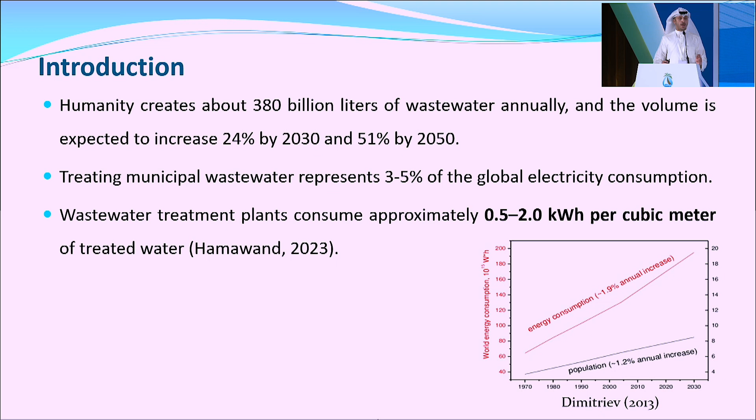Why do we have to implement such research in this field, or in Kuwait especially? The answer is two reasons. Firstly, Kuwait's vision for 2035 is to provide 15% of the energy required in Kuwait from sustainable resources. Plus, the second one is the population growth in our countries, which leads to stress on our water resources, and as a result we will generate more and more wastewater every single year.

As a result, we will treat that huge amount of wastewater. To treat this amount of wastewater, we need energy. Based on our recent literature, we found that between 3 to 5% of our global energy consumption was used in the water industry sector. By the way, to treat 1 cubic meter of wastewater, we need between 0.5 to 2 kilowatt hour. So you can imagine how much energy we need to treat all that amount of wastewater.

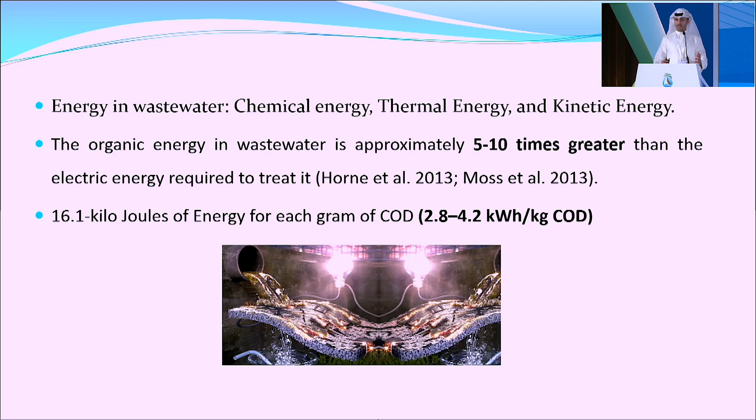On the other hand, wastewater is a valuable resource of energy. Do you know that wastewater contains 3 different types of energy? It contains chemical energy, which is hidden in the chemical compounds and the bonds between the chemical molecules. Plus, we have thermal energy, which is available as heat in wastewater, and we can extract it. Thirdly, the kinetic energy, which is the motion of wastewater from one location to another.

The organic energy in wastewater is approximately 5 to 10 times higher than the energy required to treat wastewater. So there is a massive amount of energy in wastewater. Each 1 gram of COD contains 16.1 kilojoule, so each kilogram of COD can produce between 2 to 4 kilowatt hour.

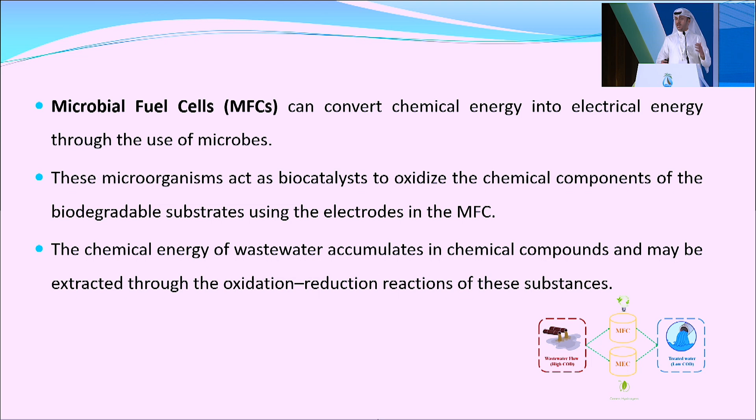There are different technologies that we use to harvest energy from wastewater, such as anaerobic digestion and bioelectrochemical systems, which include the microbial fuel cell. Microbial fuel cell is a unique technology that can convert the chemical energy in wastewater into electricity and can be used directly in different applications. The microorganisms in the microbial fuel cell act as a biocatalyst, meaning they can extract the chemical energy from the bonds and compounds and convert it into electricity.

The chemical energy accumulated in the chemical compounds can be harvested using oxidation reduction reactions in the microbial fuel cell. So the microbial fuel cell contains 2 main chambers: the anode, which operates under anaerobic conditions where the oxidation reaction takes place, plus the cathode, which works under aerobic conditions where the reduction reactions take place.

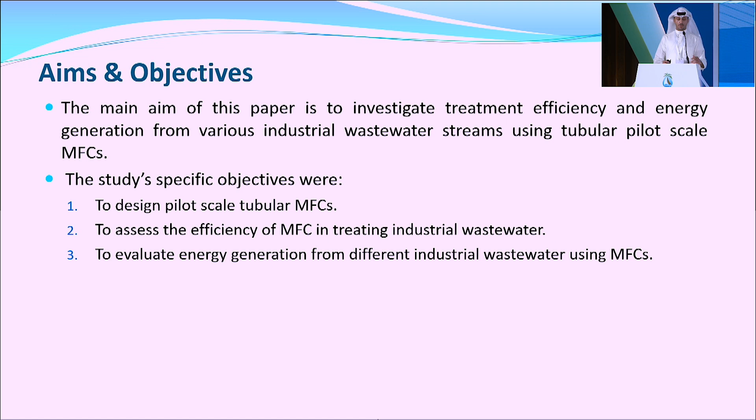Our aims and objectives for the study: the main aim is to investigate the treatment efficiency and energy generation from various industrial wastewater streams using microbial fuel cell. The specific objectives are: first, to design, operate and install a pilot-scale tubular microbial fuel cell; secondly, to assess the efficiency of MFC in treating wastewater; thirdly, to evaluate the generated energy from microbial fuel cell.

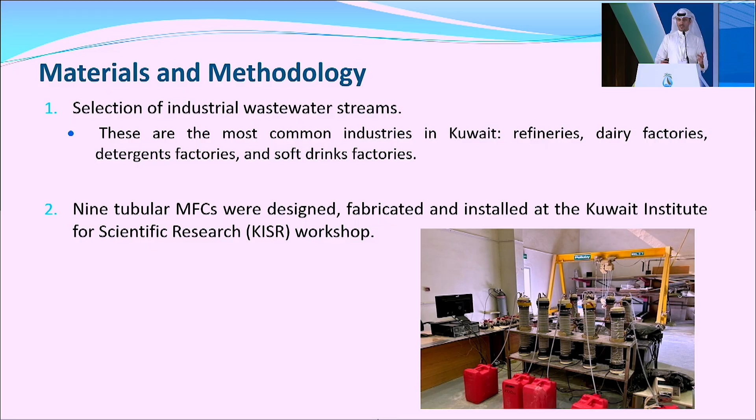Our methodology to execute this project: first, we had to select what kind of industry we are looking for. So we did a basic survey in Kuwait to identify the major industries in wastewater. Based on our results and the available literature, we found there are four main industries: first, the petrochemical industry; secondly, the dairy industry; thirdly, the soft drinks industry; and finally, the detergent industry.

From each industry, we selected 2 factories to represent it. Based on the characterization of each industry, we selected 4 factories to represent the 4 industries. The selection was based on the COD concentration, the nutrient availability, the conductivity, and the pH.

Secondly, we designed 9 tubular microbial fuel cells and ordered all the raw materials. Every single piece was fabricated at the Kuwait Institute for Scientific Research. We divided the microbial fuel cells into 4 main groups, each targeted for a specific industry.

The picture on the right shows the design of the microbial fuel cell. We used PVC pipes with a length of 75 centimeters, a diameter of 10.5 centimeters, with an overall volume of 6.5 liters. We used real wastewater from the activated sludge to inoculate the microbial fuel cell, or the bacteria, in the microbial fuel cell.

We used a carbon brush anode connected to titanium wires, plus we used a carbon cloth cathode. The PVC pipes had holes of 1 centimeter. The main idea of the holes is to keep the industrial wastewater in contact with the cation exchange membrane.

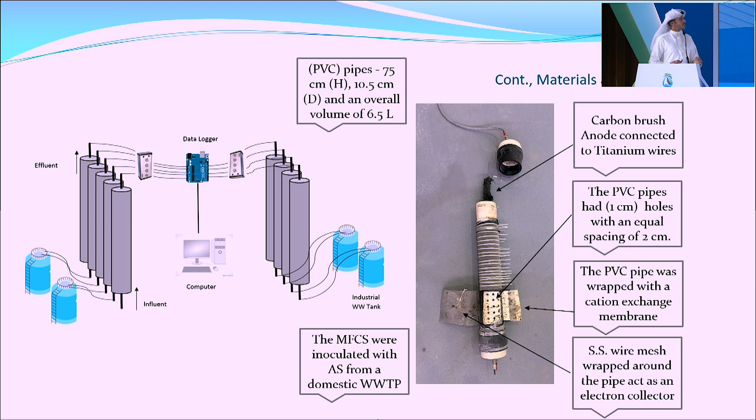We also used a CE cation exchange membrane, which is wrapped around the pipe, and on top of that we used a stainless steel wire mesh. The main idea of the stainless steel wire mesh is to collect all the electrons produced during electricity production. As you can see, we have 9 MFCs, and each 2 MFCs were fed with a specific industrial wastewater. The MFC was connected to a resistance box so we could manipulate the load, selecting different loads, and it's connected to a data logger which records the produced voltage and stores it in a PC.

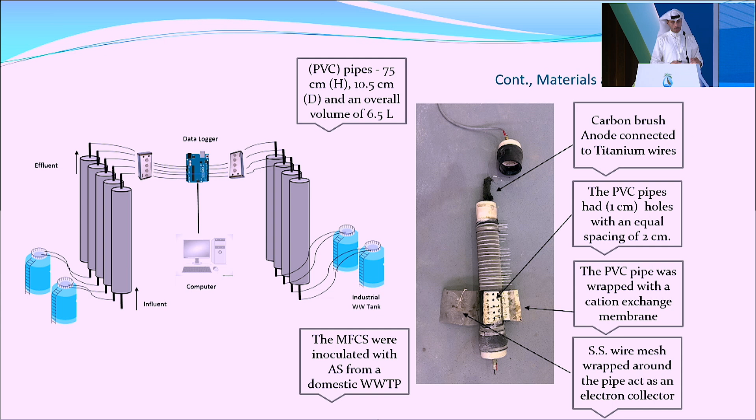The results: all the MFC were continuously operated for more than 120 days, and thankfully we haven't had any major issue with our microbial fuel cell. We had just minor issues such as blockage of the pipes, because all the industrial wastewater was fed to the MFC without any filtration, so it was raw industrial wastewater.

All the MFC generated a maximum open voltage. By open voltage, I mean there was no load, so this is the maximum the MFC can achieve. The dairy wastewater achieved the highest open voltage, about 0.62 volt, followed by domestic wastewater at 0.5, detergent at 0.49, soft drinks at 0.46, and finally the petrochemical industry.

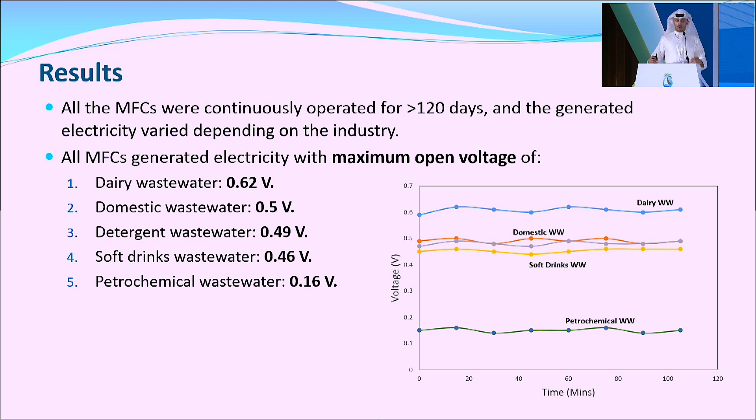By the way, with the petrochemical industry we had a major issue with the characterization of the petrochemical waste. It contains different toxic materials, such as anti-foaming agents, corrosion inhibitors, and demulsifiers, which could inhibit the growth and activity of the bacteria, and that led to the low generated voltage in these MFC.

In terms of Coulombic efficiency, we mean the amount of electrons we harvest from the industrial wastewater that can be used for electricity production. So the higher the CE, the higher the MFC efficiency. Our CE was too low in this study, between almost 0 to 2.9. 0 was for the petrochemical industry, and the maximum 2.9 was for the soft drinks, I believe.

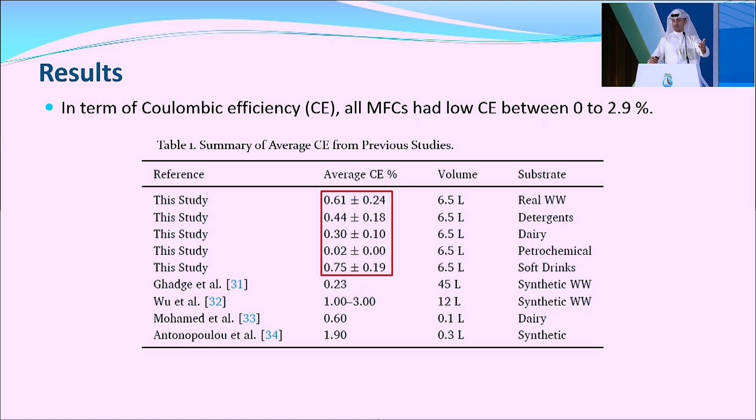If we compare our results with different literature, it seems our values are in line with them. In some cases, our values are even higher than small-scale microbial fuel cells. By the way, I have to mention we are using real wastewater without filtration, so it's very complicated. If we could just convert it to synthetic wastewater, we would for sure have higher efficiency of the MFC.

In terms of power density, the dairy wastewater was able to produce...

One minute, please? Four minutes? One minute. One minute, sorry.

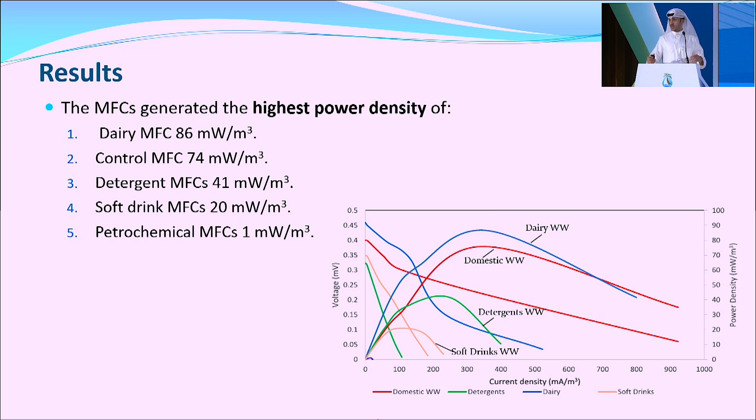So our highest power density was achieved in dairy wastewater, and each cubic meter of wastewater can produce between 86... I have to go fast.

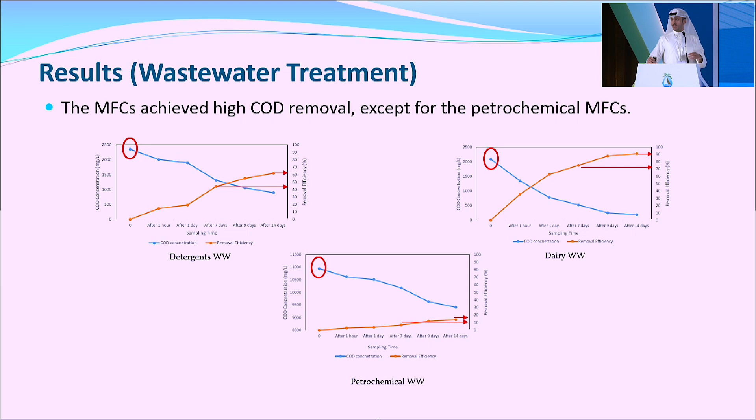In terms of wastewater treatment, the MFC achieved a very high efficiency of treatment, especially with the COD removal efficiency. I have to go fast.

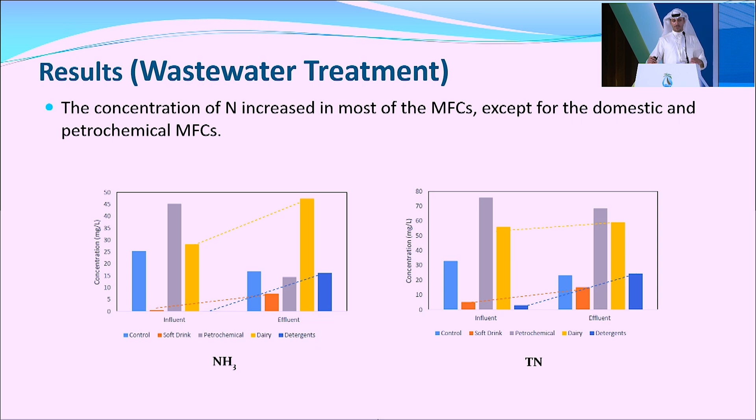In terms of nutrient removal, the MFC were not able to remove nutrients such as phosphorus and nitrogen. By the way, phosphorus was increasing in all the MFC because under anaerobic conditions, bacteria try to release the stored phosphorus in their cells, so we have high phosphorus in the effluent. In terms of nitrogen, it followed the same pattern, except for domestic wastewater, which was operated as a control.

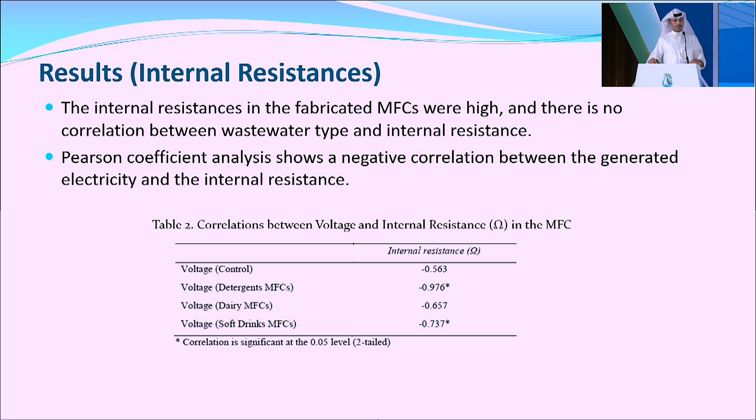In terms of internal resistance, the MFC had a high internal resistance, which negatively affects the performance of the microbial fuel cell. For the conclusion and recommendation: I think the main idea of this project is to characterize and identify the best streams that can be used for microbial fuel cell, and it seems that the dairy industry was the best stream for this purpose.

Before I talk about the membrane part and functionalization, I would like to talk a bit about some of the leading work that we do in the center. We do a lot of work on water treatment using membranes, and one of those is membrane distillation for hypersaline water.

This is a project that we have with the Ministry of Agriculture and Fisheries Wealth and Water Resources in Oman. We have a pilot plant where we desalinate brine water coming from an RO desalination plant, from inland desalination.

We also do membranes for medical use, and we have a patent application on catheters trying to reduce the infection rate from using catheters in hospitals.

We recently, two years ago, applied for a patent on membrane recyclability. Of course, we rely on reverse osmosis in almost all of our desalination. Probably only maybe Emirates still rely heavily on MSF and thermal desalination. However, we have been transitioning towards reverse osmosis.

With reverse osmosis, we have a lot of RO membranes that we throw away. With this work, we recycled the RO membranes so that we can use them for wastewater treatment. We are currently trying to move forward and repurpose this, reapplying these again for desalination as well. This is the next phase of our work.

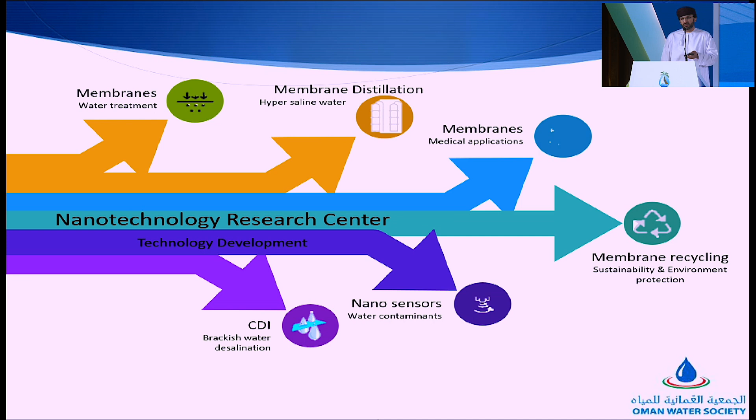We are working on nanosensors for water treatment and sensing of any kind of fouling, and this is a patent that we are currently working on. We are also working with capacitive deionization for brackish water desalination, and we have two patents on this. So very briefly, that's all of the work that we do in the Nanotechnology Research Center.

Before we talk about membranes, we need to talk a bit about wastewater. In Oman, it's not really the usual wastewater that we need to think of. It's also the produced water, but I'm not going to talk about produced water. I will talk about other industrial wastewater, because not all of the water is domestic or municipal wastewater. There are a lot of other sources of wastewater.

These are very difficult to work with, and also it's not easy to determine what exactly is the best treatment for it. Probably we need a lot of different treatments for it.

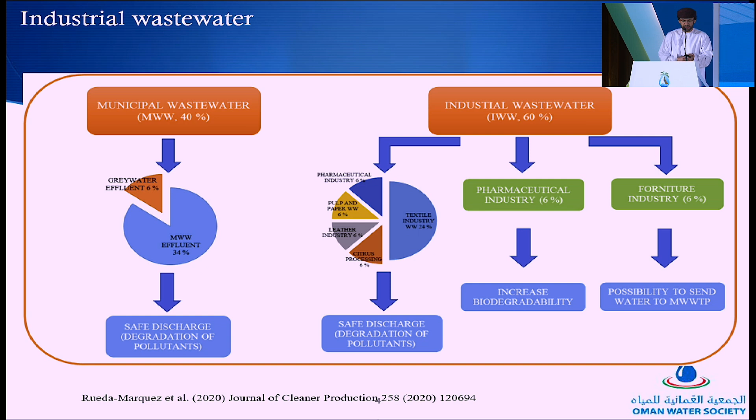Just to stir the pot, I know there are a lot of people here advocating using treated wastewater for agriculture purposes. That's fine, but also we have a problem with emerging contaminants, or what we call persistent contaminants.

There are a lot of studies on this. We worked with groups from South Africa and other areas where there are a lot of persistent contaminants that usual conventional wastewater treatments cannot remove.

These amounts are very minute, and usually for water quality, we just look at it as a number rather than a type. What type of contaminants are there in the treated wastewater?

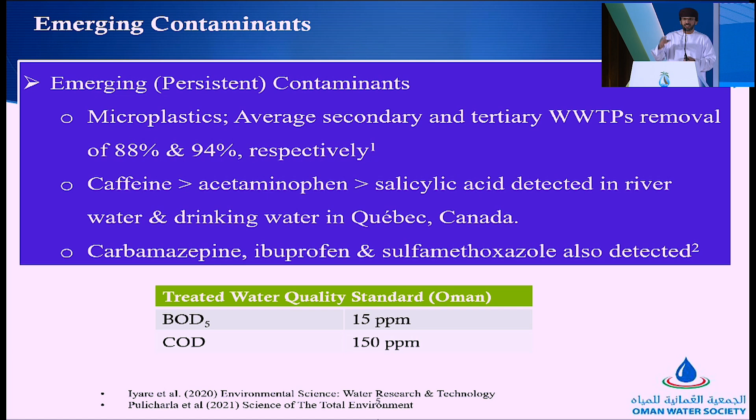A lot of antibiotics, a lot of medical compounds, even caffeine is there in the water. In South Africa, our team collaborators found a lot of caffeine and other endocrine disruptors in the Antarctic, where penguins had a lot of fatalities because of these endocrine disrupting chemicals.

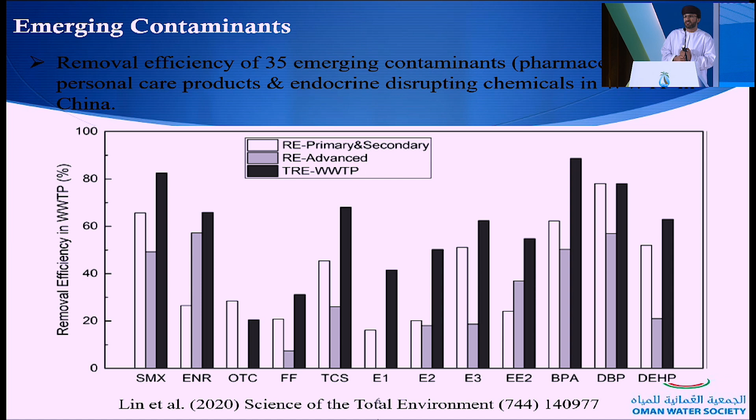This is a study that was done in China for 35 emerging contaminants, mainly pharmaceuticals. As you can see, it's not really easy to treat those with domestic or municipal wastewater treatment. Some of those treatments only remove 10 to 15% of those. And again, 1 microgram or 1 milligram per liter is a lot for these.

They are very toxic. So moving forward, these are membranes. Of course, the usual membrane that we talk about is the typical one, which is pressure-driven. We apply pressure on one side, and then the water will pass through the semi-permeable layer or membrane and will not allow the other contaminants to leave.

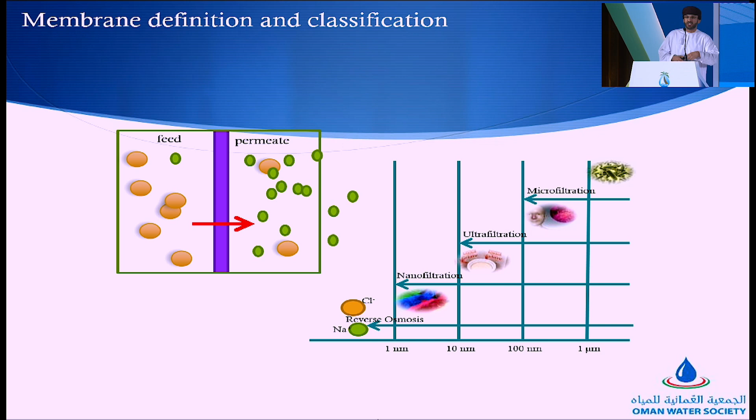And that's why we have these differentiations from microfiltration to reverse osmosis. However, there are a lot of other membranes and technologies not covered here. We talked about membrane distillation yesterday, there was a talk about forward osmosis, pervaporation membranes, and microbial biofuel cells as well - they use membranes. Even capacitive deionization, we can apply membranes there. Of course, not even talking about electrodialysis and electrodialysis reversal and all of those.

I'm not really going to talk about this in detail because it requires a lot of time, but we rely on membranes in almost all of the desalination and water treatment we do. Whether it's wastewater treatment with membrane bioreactors, or desalination with reverse osmosis and ultrafiltration, microfiltration for pre-treatment. There was a lot of talk about nanofiltration for pre-treatment or desalination for brackish water, although it's really not taking any push in that regard.

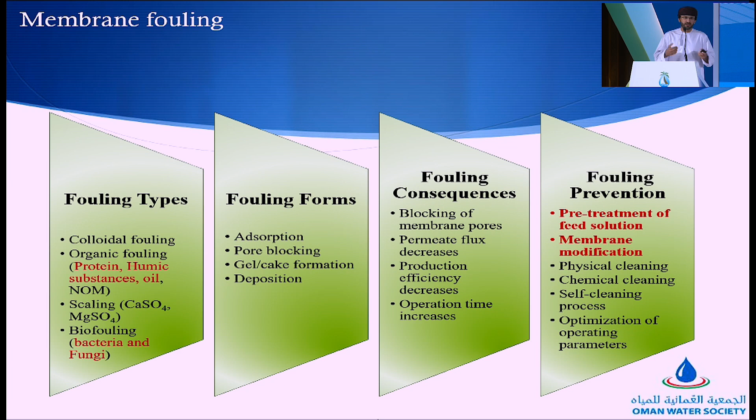But we also have a lot of problems with fouling - different types depending on the water source. Biological fouling is the main one for reverse osmosis and seawater desalination. Biological fouling and organic fouling is a main issue with wastewater treatment. And that's why what we do is say, why not functionalize these membranes with nanomaterials.

So that we can reduce the fouling, or at least increase the flux and the rejection. With nano applications, we have a lot of uses - we can use nanoparticles with the membranes as adsorbents or functional membranes for separation, Fenton catalysis, nano disinfectants which are very good and very strong, and a little bit about photocatalysis as well.

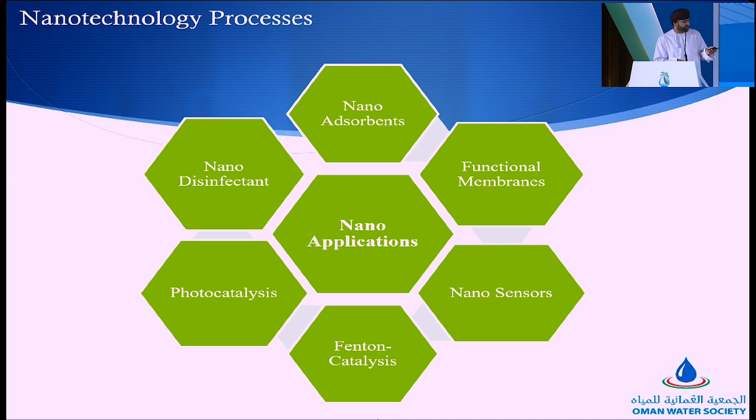So we need nanotechnology because compared to other technologies, it doesn't produce secondary pollution, or it produces benign secondary pollution that we can put in the environment without any harmful effects. It's also low cost, has high efficiency, and is environmentally friendly.

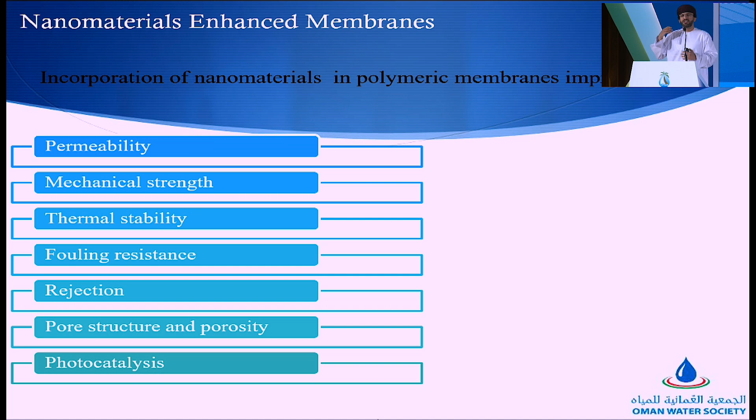And so when we talked about membranes, we don't really look only at the rejection and how much water we produce. There are a lot of important properties for the membrane. Permeability is important, mechanical strength is very important, thermal stability, fouling resistance, rejection, pore structure. And also photocatalysis, which is quite new, trying to have photodegradation as well as rejection of organic matter.

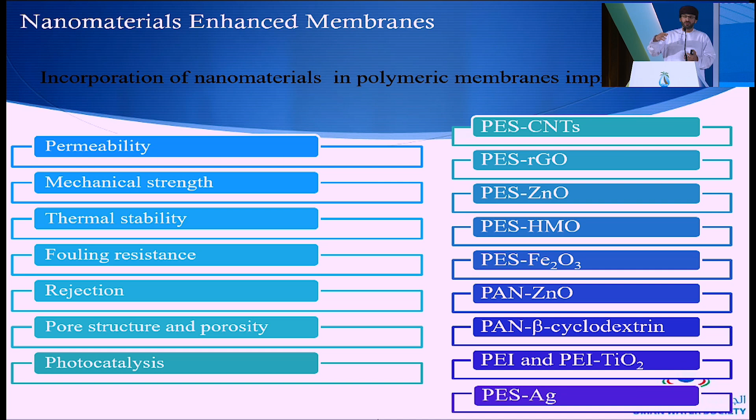This is why in the center we've worked with different polymers for the membrane network and structure, but also different nanomaterials for that - starting from carbon nanotubes, where we have a patent for this, reduced graphene oxide is another thing, zinc oxide and titania and silver as well. So we use different kinds of treatment.

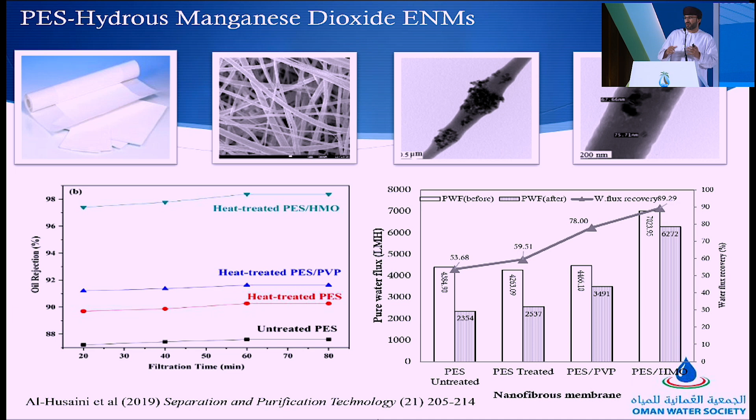Another work that we have done, for produced water from the oil industry, uses different nanomaterials - here we have the hydrous manganese oxide. And you can see that with the hydrous manganese oxide, we had close to 100% removal of the organic matter, but we also have higher water production. So the good thing is we have higher water production, which is fantastic, higher permeability, but also higher rejection, which is good in both ways.

Another study is photocatalysis. Photocatalysis is different from other treatments. What we need is an energy source, and previously it was ultraviolet, which is not really a good source because it's expensive and very dangerous.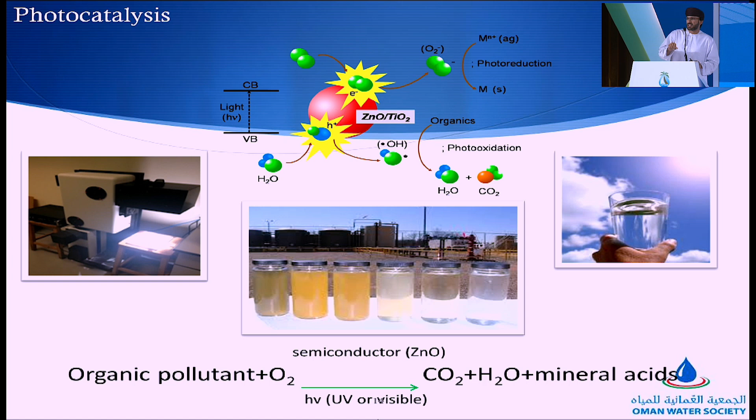What we use here is solar light, normal solar light. And what we need is a very basic contact between the nanomaterials, the photocatalyst, which is a semiconductor like zinc oxide or titanium, but titanium is not good for solar light. Zinc oxide mainly.

A contact between the organic matter at the surface of the nanomaterials with the solar light, and we have reactive oxygen species, electron holes, hydroxyl radicals, and all of those, and these will react with the organic matter, degrading them into carbon dioxide and mineral acids. And with that, all kinds of organic matter, instead of rejecting it and going into the reject, it's actually degraded and completely removed from the water.

So this is one of the studies we did in the marina for photocatalysts. This is with a group from the College of Agriculture and Marine Sciences. And we had very good results in that, no growth of any kind of macromolecular or micromolecular matter.

Another study for natural organic matter, and we got more than 77% degradation, whether it's rejection or full degradation of the natural organic matter. And also we had a higher water flux.

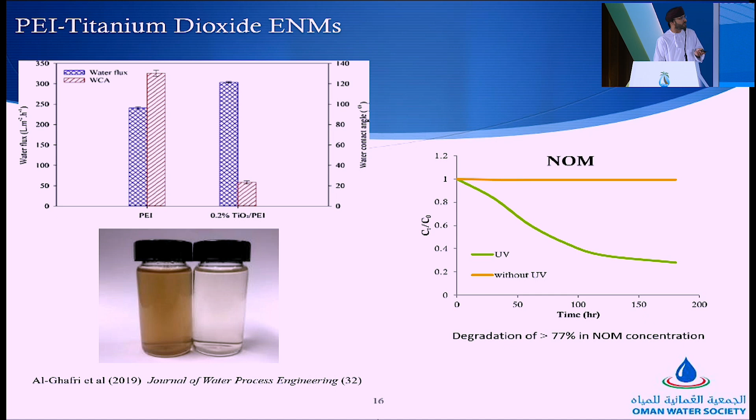Another study we have done is growing zinc oxide nanorods on the membrane matrix, whether at the surface or inside. We actually got amazing results, because one of the major 80% of the problems of reverse osmosis is biofouling, bacterial growth. And what this did, with the zinc oxide growth on the membrane matrix, even after 48 hours of operation, the bacteria is actually dead.

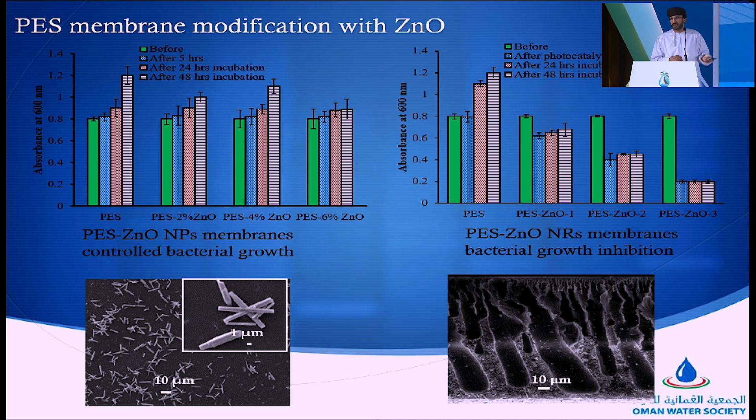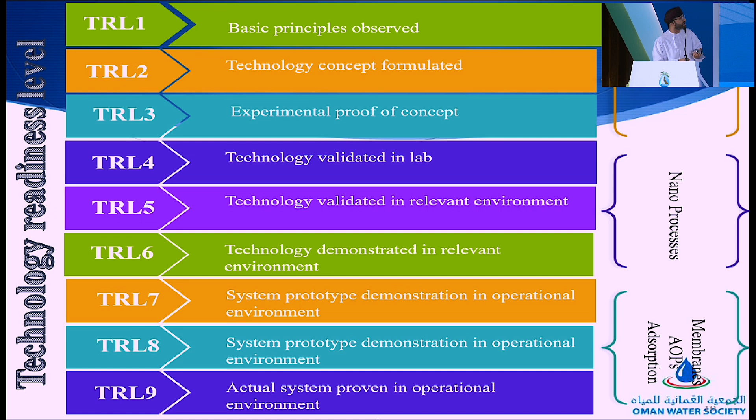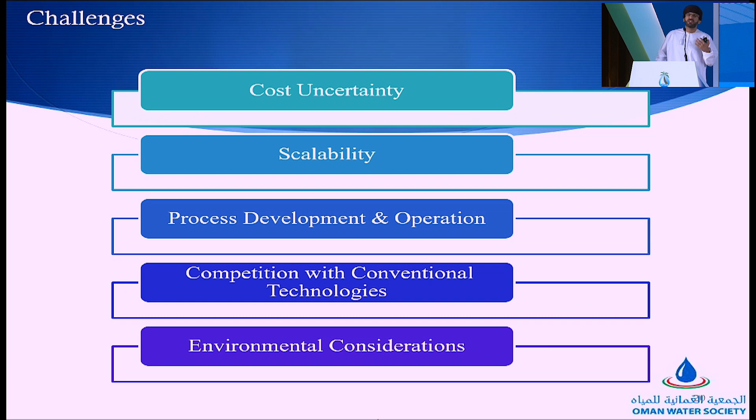Unfortunately, even with those results, we are really on the second part of the technology readiness. We are still in TRL4 to TRL6. This is because we have a problem with cost uncertainty. We don't know how much this will cost if we apply it in industry.

There is also a lot of competition with conventional technologies. The current companies have extensive experience in conventional methods, and of course they don't really welcome competition. So you need a lot of initial investment to push towards that, and other environmental considerations as well. And probably I will miss this, but also the problem is from our side as researchers and academics.

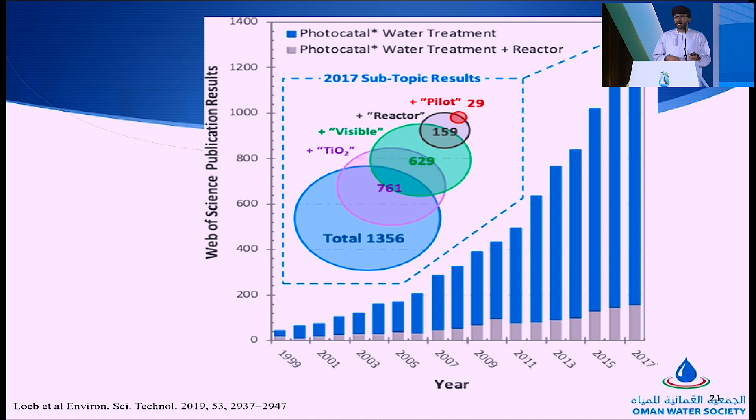We really concentrate on the fundamentals. So from this study in photocatalysis and water treatment, you can tell that almost all of the publications are in the main fundamental capacity building. Very, very few pilot studies and reactors, which is not really good if we want to apply this in the industry.

That's why if we really want to go forward, even if this technology currently is not suitable for the mainstream, for desalination of seawater, we can look at niche markets, small markets, industrial wastewater, dairy wastewater and all of that. Why not apply it for those? Because they are very competitive in that regard.

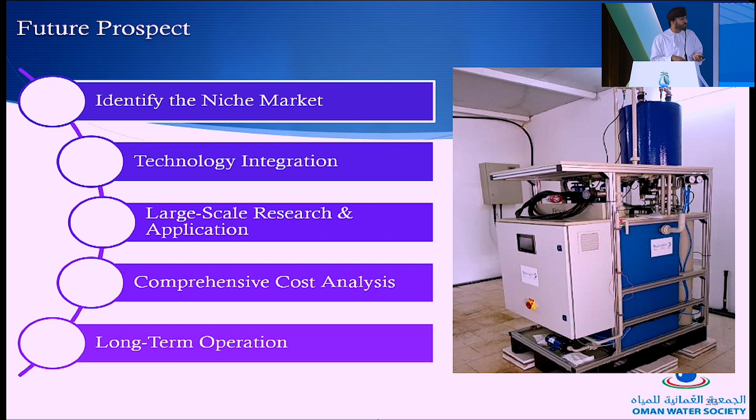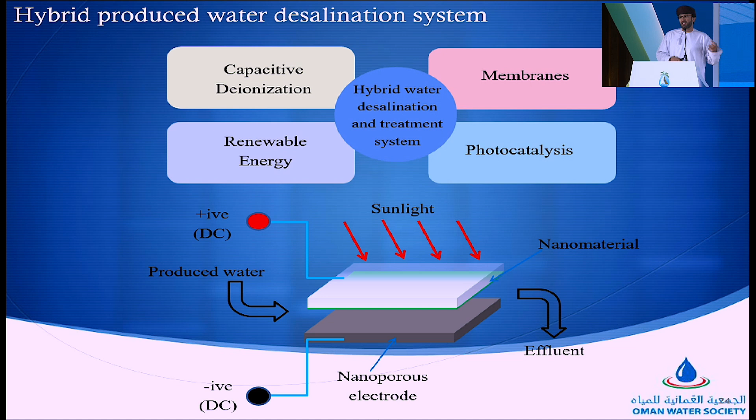This is why in the lab we are currently looking at a hybrid system, where we will have capacitive deionization for desalination, membrane technology for removal of organics and inorganics, and photocatalysis with nanomaterials for degradation and biocidal treatment. Basically, using renewable energy, we combine three different technologies in one big system: capacitive deionization, photocatalysis, and membrane, for complete removal. This is very good for small scale, comprehensive inland desalination.

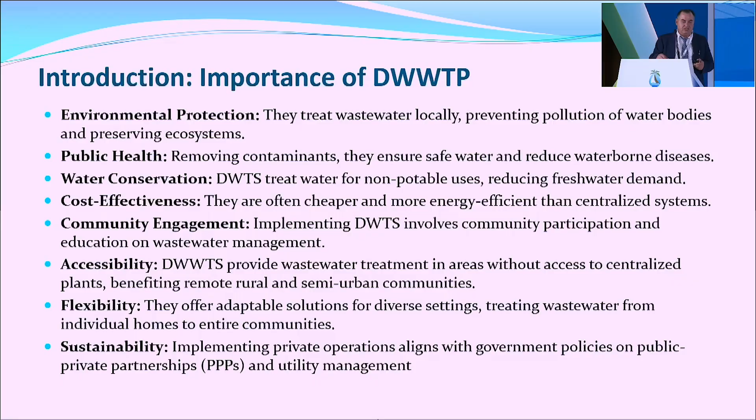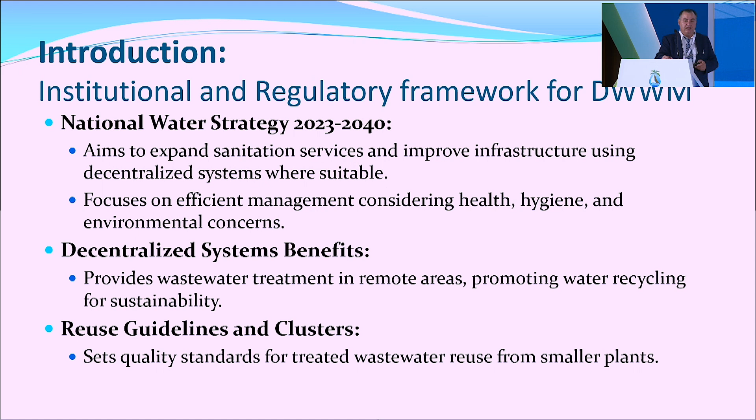In Jordan, at least we have an institutional and regulating framework. We have national water strategies that aim to expand sanitation services and improve infrastructure using decentralized systems where feasible, focusing on efficient management, taking into account health, groundwater vulnerability, hygiene, and environmental constraints. Decentralized systems can be implemented in remote areas with less population density, and standards and guidelines have been prepared for this.

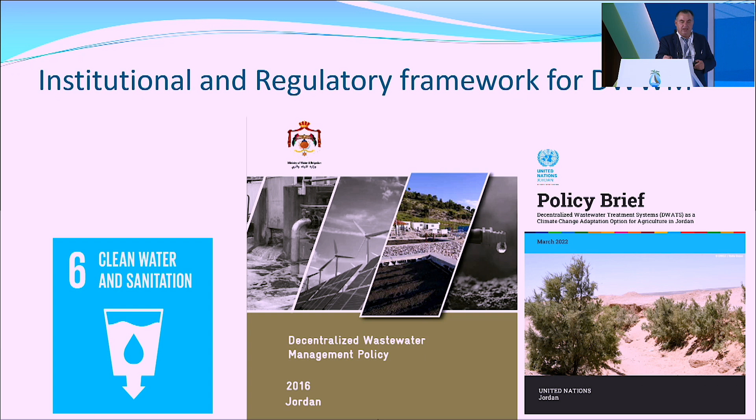In terms of institutionalization, Jordan is one of the countries in the Arab world that has prepared decentralized wastewater management policies. This policy is now being updated in cooperation with the United Nations, which also provided a policy brief for decentralized waste management.

Now, connecting the decentralized system with SDG goal 6.2 - achieve access to adequate sanitation and hygiene for all - the word 'all' is very difficult. In Jordan, at least, we said by 2030 we cannot provide sanitation services to all. Let's achieve 85% in Jordan, whereas remote and rural communities cannot be achieved.

So let's concentrate on communities with less than 5,000 population equivalent using decentralized systems. Above that, centralized systems; below 100, let's leave it for the next generation. Also important are improved water quality, reduced water pollution, and the participation of local communities.

Due to topographic factors, there are 5 steps to selecting technologies, which I won't go into detail on since I'm not an expert in how to select the most suitable wastewater technologies according to effluent quality, topography, BOD, COD, etc. But there are 5 steps to select the appropriate technologies for each site or community.

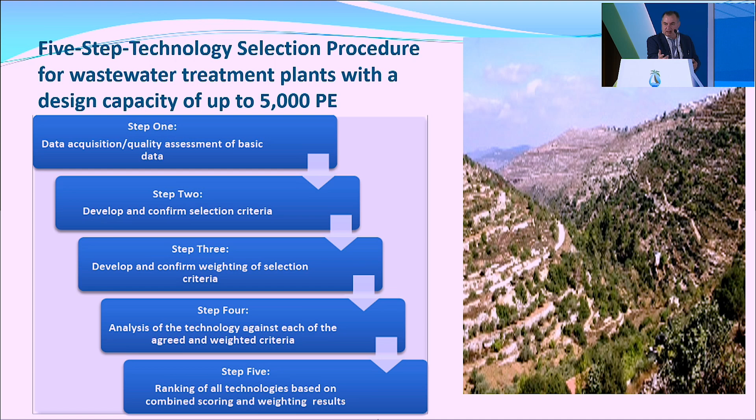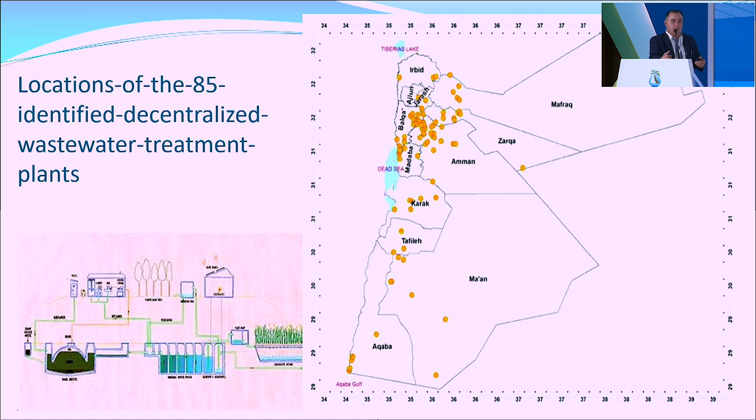According to the work we have, 850 communities in Jordan are small communities. We identified that 85 communities are suitable to implement a decentralized wastewater treatment system.

Most of them are in the north of Jordan, where there is high rainfall and also a vulnerability related to the groundwater system and also related to

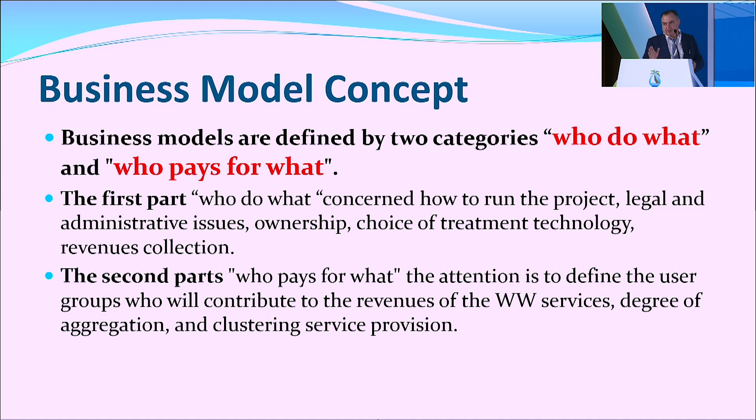wastewater vulnerability regarding the health impact. Now to the concept of the business model, we have two principles: who does what, and also the polluter pays principle. So anyone who pollutes the environment has to pay. Also, the first question is how to run this small scale

decentralized system or small plant, which in most cases requires only 2 or 3 persons maximum. And the second part, who will pay to cover the cost of running it, and also the question, what is the benefit of the one who runs this business? He looks or seeks for profit.

And we know that most wastewater treatment systems are financially non-feasible and do not generate enough profit for operation and maintenance costs, regardless of full cost recovery.

So the objectives are to review the existing decentralized wastewater system framework, including institutions, law, rule, and regulation, and coordination, and recommendations for improvement, and to provide concise policy suggestions to enhance the decentralized wastewater system.

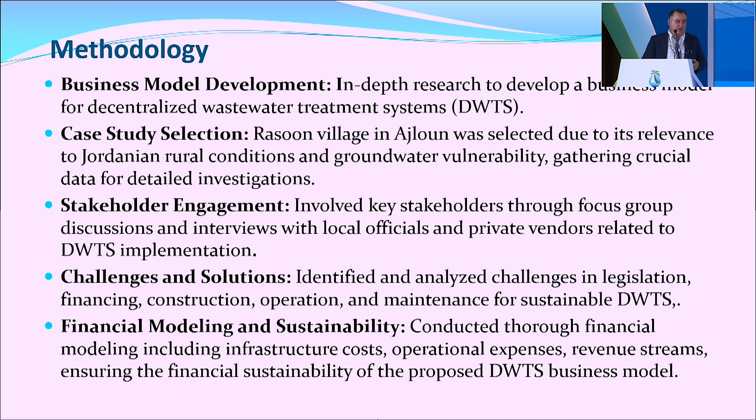So we discussed with them the challenges and solutions to identify the challenges in legislation, in financing, in construction, operation, and maintenance, and proposed a suitable financial model for sustainability.

So one of the results - in general in Jordan, the sewer system coverage is 68% in 2022, funded by government sources, international donors, and also household water bills.

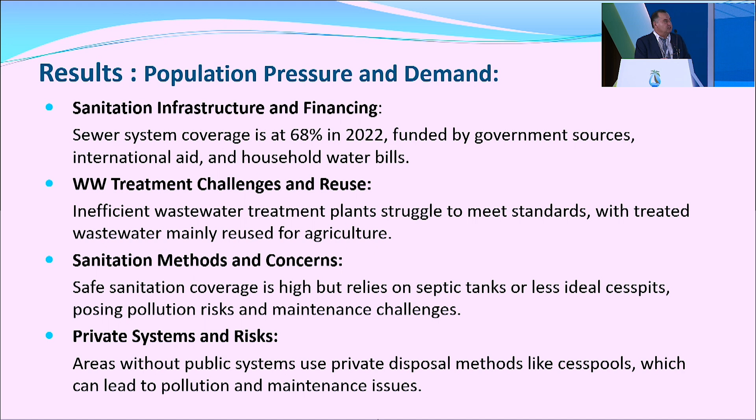Wastewater treatment challenge: inefficient wastewater treatment plants struggle to meet the standard, with treated wastewater mainly used - 90% - for reuse in agriculture, and there is some violation in some indicators.

But this indicator can also be accepted if it doesn't have a long-term impact on hazard and risk.

Also, on sanitation methods, private systems in risk areas without a public sewer system can use private disposal methods like cesspits, not septic tanks. Septic tanks are accepted as a method of wastewater treatment or collection.

There's also institutional challenges in Jordan - at least the role of the institution is not clear. The ownership of the decentralized unit or treatment plant is not clear either. Maintenance responsibility, inadequate regulation and framework to monitor effluent quality.

There is also potential concern from private sector engagement. The private sector is looking for profit, but they also need long-term financial viability, requiring stable regulation and financial conditions, including tariff clarity and subsidy. We need to know subsidy commitment in advance.

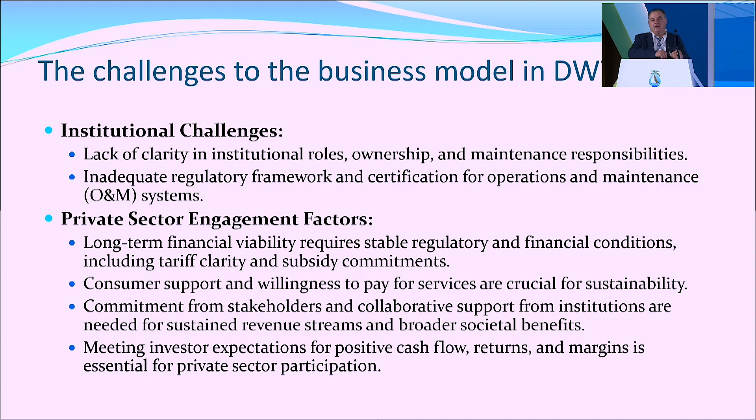If we construct or implement this decentralized wastewater treatment plant, if the investor goes bankrupt, we cannot close this unit since people are relying on it. So how can we handle the risk of unsustainability if the investor goes out of business? This is one of the concerns.

Also, we discussed the type of ownership model, either governmental, private, full privatization, or a mixture of them, and there are many options. The most selected option is municipality ownership as subordinate with their companies.

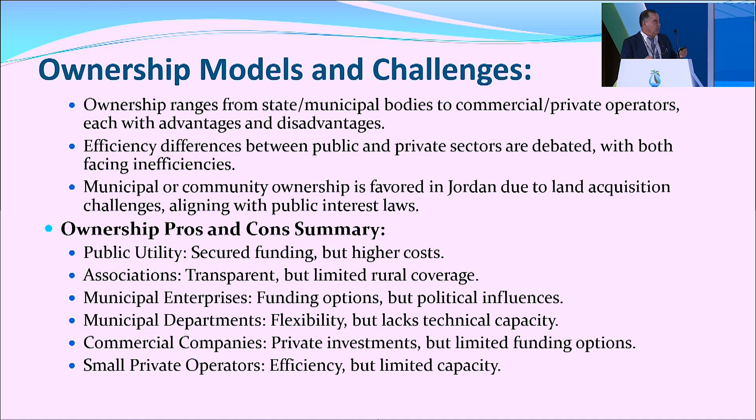So from public to full privatization, and the option selected by stakeholders is municipality ownership.

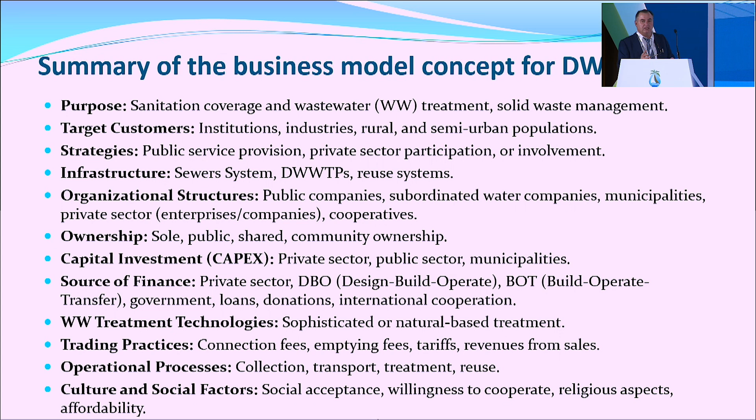The summary of the business model: we need to define the purpose - either collection or treatment or together, or using the effluent. Who is the target consumer, what is the strategy - public services, full private sector, or mixture. Organizational structure - public company, subordinated water companies, municipalities, private sector. Ownership - either sole ownership or public or shared, and we found that in Jordan it's community ownership, municipality ownership.

How much is the CAPEX or capital investment cost? How much is the operational cost? Source of finance - how we can finance this decentralized wastewater treatment plant, either build-operate-transfer, design-build-operate-transfer, designed, etc. Also, how much to set the water tariff and operational process.

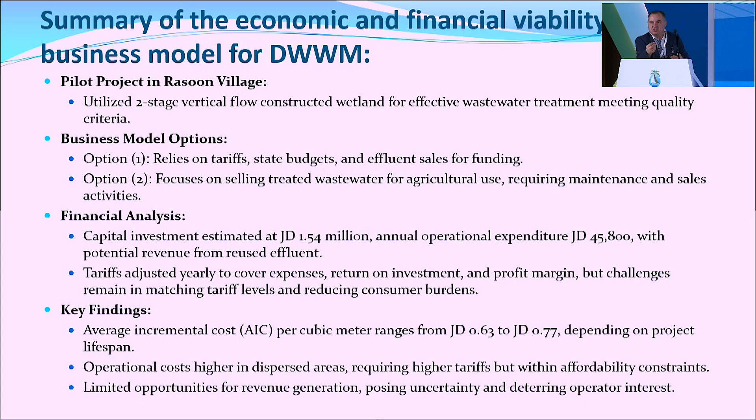As a summary, we find the average incremental cost, or the cost per cubic meter. In the business model, we are not looking at how much is the IRR or the benefit cost ratio. We are looking at how much is the cost per unit of cubic meter. In our case study, the treatment cost of 1 cubic meter is 0.6 JD, equivalent to less than $1. But the tariff from the consumer is less than 0.2 JD. So who will pay this difference?

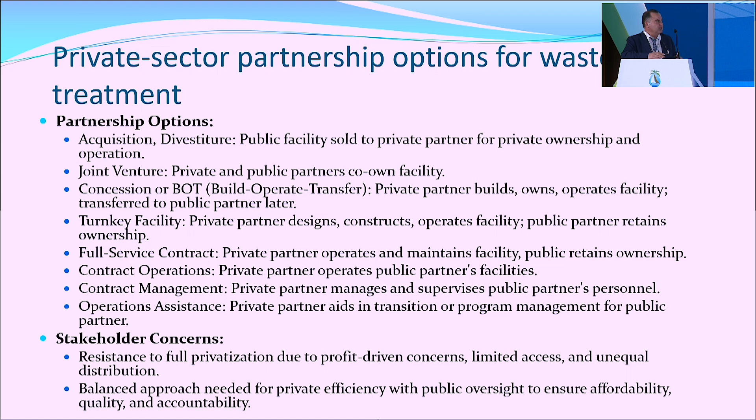We have also studied private sector participation and private sector ownership, and we found that most business related to providing either a service contract or performance contract is the best way to handle decentralized wastewater systems.

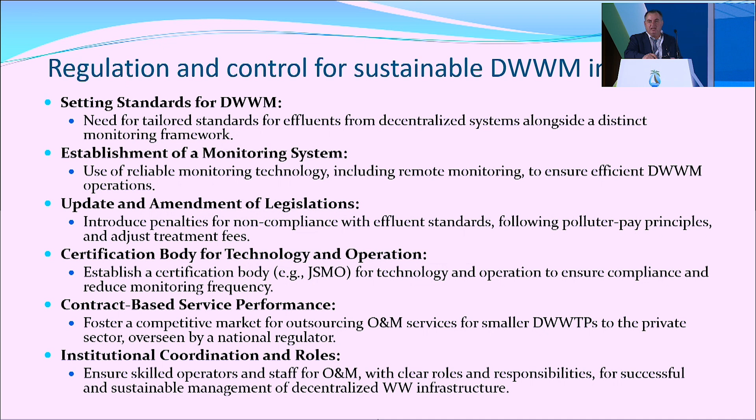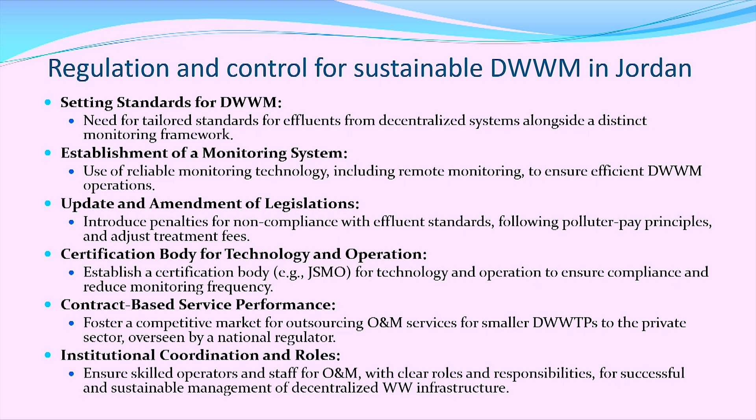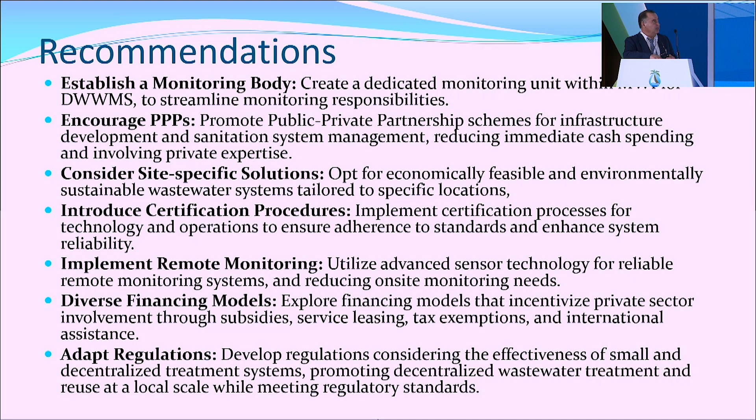Now I will go to regulation and setting a standard. It's important that we need a certification body for wastewater treatment technologies, because technologies are wide and different. For the decentralized system, we need a certification body, and also to amend regulation and institutional capacity coordination and roles. As a recommendation: establish a monitoring body for decentralized wastewater effluent, encourage private sector participation, consider site-specific solutions for each different community according to their needs, topography, and density. Also implement remote monitoring technologies for monitoring effluent from wastewater treatment plants, and diversify the financial model. Thank you for listening.

I hope I covered the aspect quickly.

Thank you, thank you very much, Doctor. Again, a big set of results. Designing a successful financial or business model for these kinds of centers in remote areas is very, very needed in the region. So thank you very much.

I think we successfully saved a few minutes for questions and discussion, and I think the topics are very important and deserve to be elaborated more. So let me take the questions that we have, and then we will give the speakers a chance to address these questions. We have the first question here.